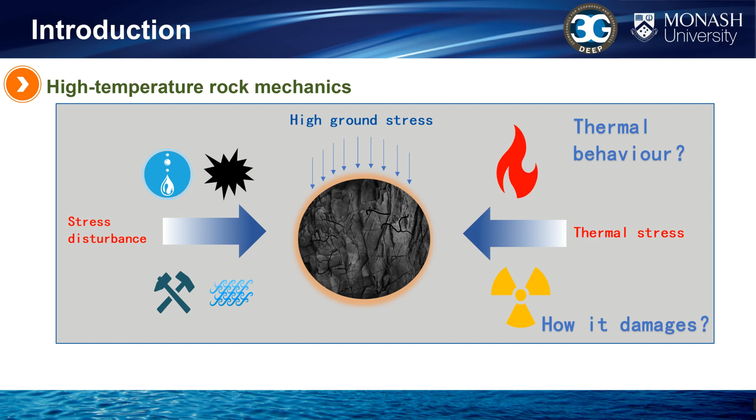The structural surfaces will weaken the rock integrity and mechanical performance to some extent. The engineering rock masses with defects are also exposed to frequent dynamic and thermal stress perturbations. It poses numerous potential risks to engineering activities and increases the cost of prevention, monitoring, and treatment in budgets.

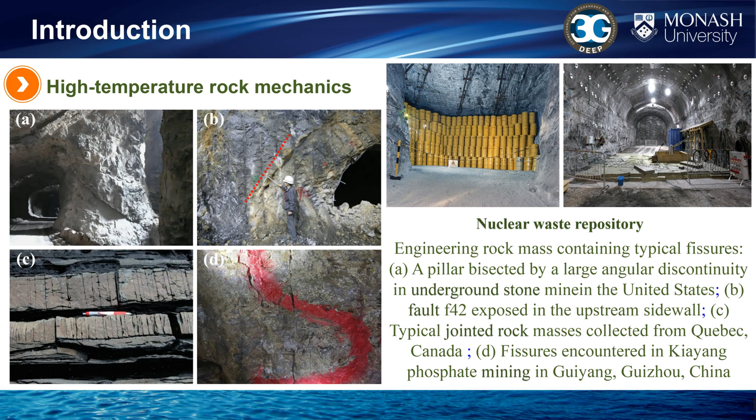In Study 1, we have conducted the investigation of a fissured red sandstone with thermal storage potential subjected to descending amplitude low cycle impacts. DALC impact tests are conducted on the fissured red sandstone after thermal treatment utilizing a modified split Hopkinson pressure bar, and the point cloud data of the fracture surfaces from the failure specimens are captured using a high-precision 3D laser.

The fractured surfaces are systematically characterized through an array of parameters, employing digital image techniques and statistical methodologies. Additionally, the analysis delves into intricate mechanisms of thermal damage and fracture evolution. This exploration leverages the mineral and thermal properties, DEM simulations, and strain energy density theory. Eventually, mathematical and statistical methods are applied to reveal the complex relationships between DALC mechanical parameters and the fracture surface features.

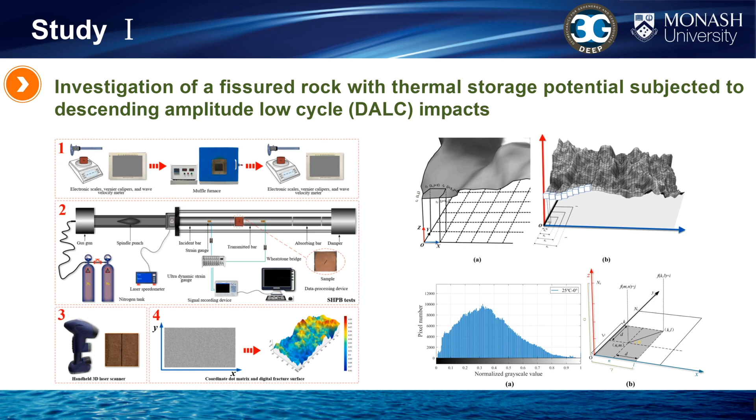We established relationships between the DALC impact mechanical parameters, including elastic modulus, failure peak stress, failure strain rates, failure strain, and fracture surface parameters, including fractal dimension, joint roughness coefficient, second-order statistics of grayscale covariance matrix, and textural parameters including ASM, COR, ENT, CON, and the elevation parameter.

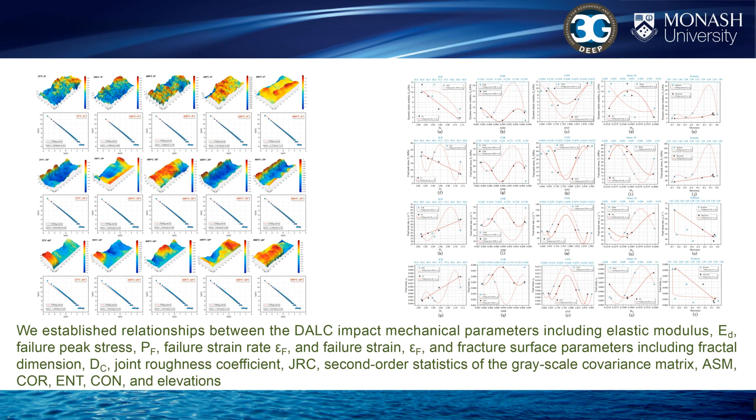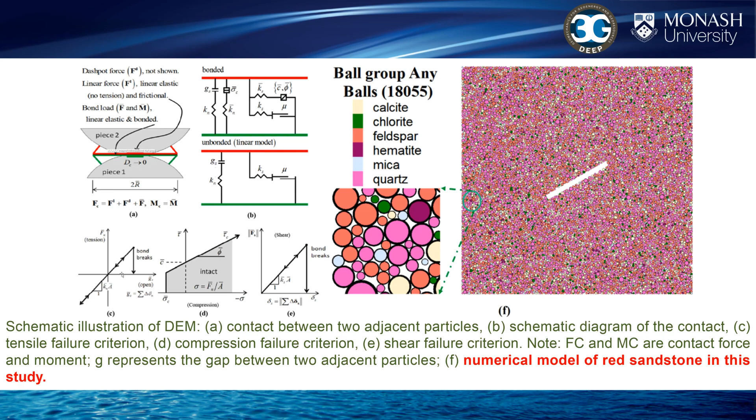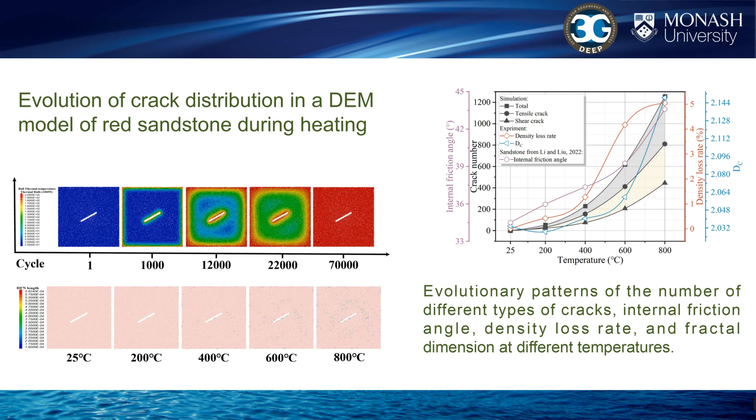We also simulated the evolution of thermal damage development in the specimen using DEM. The number of different types of cracks, internal friction angle, density loss rate, and fractal dimension at different temperatures show evolutionary patterns with similar trends.

In Study 2, we have conducted the investigation of fissured red sandstone after thermal treatment with constant amplitude and low cycle impacts. In this work, red sandstone samples after the same heat treatment as in previous studies were tested by XRD and STA respectively. The CALC impact tests were performed on the specimens using a modified split Hopkinson pressure bar, and the microscopic characteristics of the fracture surfaces of the specimens were examined using SEM.

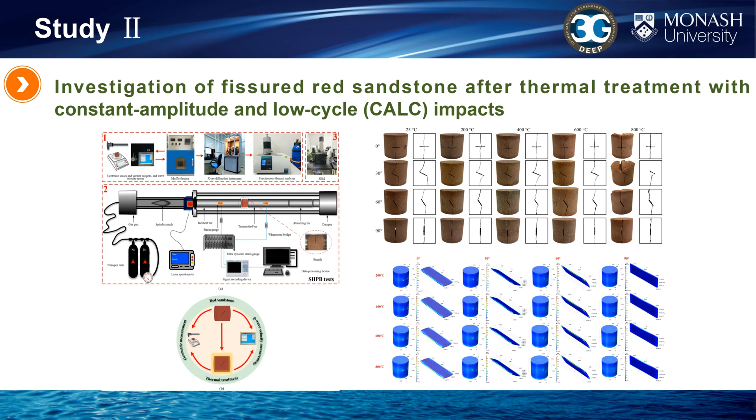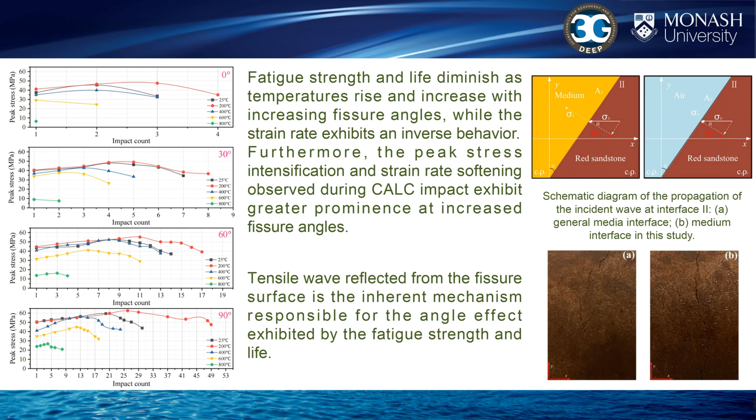The elevated density of fatigue and some cracks in the grain causes the formation of the compressive crushed zone, resulting in the growth of macroscopic cracks nearly perpendicular to the stress wave direction. Additionally, temperature exerts a positive effect on the ASM and COR of the grayscale co-occurrence matrix in SEM image, yet a negative effect on the ENT and CON.

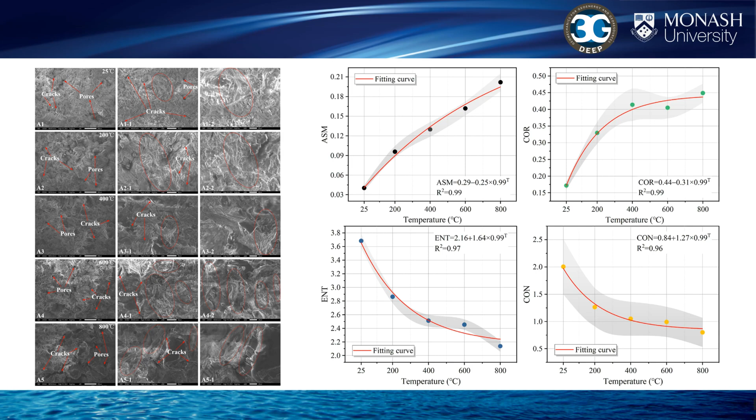The results of the above research have been published in the JRMGE and JEAs respectively, and I have also completed the data processing for my PhD thesis while at Monash University, which will continue to be published. Please keep me in the loop if you are interested.

The primary objective of 3G Deep is to advance resource recovery in relevant fields, with a long-term vision of fostering technological innovation for environmental protection and the safe, practical extraction of resources from deep earth. Our efforts are concentrated in 4 main research areas. First, climate action plan. Second, unconventional oil or gas, renewable geothermal energy, and hydrogen. Third, new mining methodologies. Fourth, waste to wealth. Guiding all our projects at 3G Deep are the UN Sustainable Development Goals 7, 9, and 13.

My time in the joint program at Monash University has been one of the most valuable experiences of my academic journey. Here, I made many new friends and broadened my academic horizons. I feel incredibly honored to have this opportunity to study and grow under the guidance of Professor Ranjith. From him, I have gained many positive life attitudes and invaluable research experience.